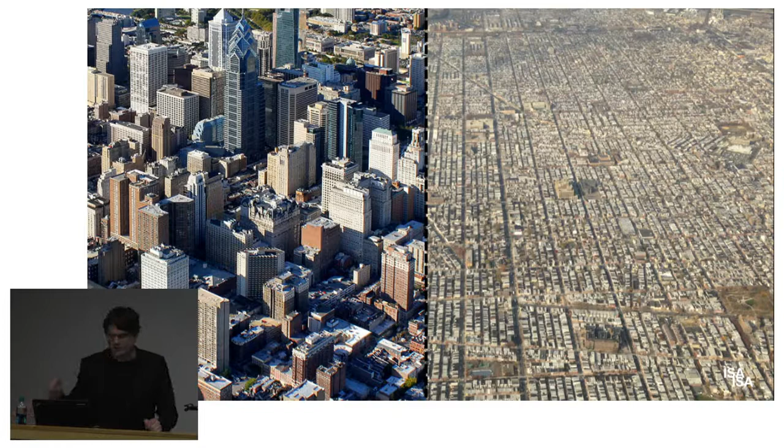But the part of the city that interests us and really got our start is what I like to call the flat, which is this sort of 3-story row house fabric, which you're seeing on the right. Something like 450,000 row homes in Philadelphia. And the density of those blocks is kind of amazing.

There's 100 unit per acre density happening in those neighborhoods where the typical lot is 16 by 50 feet, which might be 4 times the density of the typical. I think someone told me today 30 by 100 is the standard lot, so I think you can fit 4 of those lots in one Detroit lot. So quite a bit of density.

But what we kind of came to, and what still characterizes a large portion of the city, is this sort of fabric where, and as Detroiters you can appreciate this, that's not all a bunch of parks, that's vacant land. So while the fabric still kind of hangs together with the row houses, there's a lot of open territory for redevelopment.

And I think right around the fringe, a lot of our early work, right around the CBD where the 3-story fabric meets the city, which is kind of the leading edge of development, an awful lot of construction has happened there. And that's also where the main industrial ring was as well, so there was a fair amount of vacant land there.

So just a couple of thoughts before I jump into the work. These are just kind of, unlike the words I'm saying which are a little off the cuff, some written, precise words about the way we think.

And I think out of the gate, partly because we opened our office a few years before the housing bubble, which meant that everybody got laid off in 2008 in one afternoon, a lot of firms had to think about how to do things other than buildings. And I think that led us to caring a good deal about buildings, but also caring about teaching and caring about curation and experiments and special initiatives.

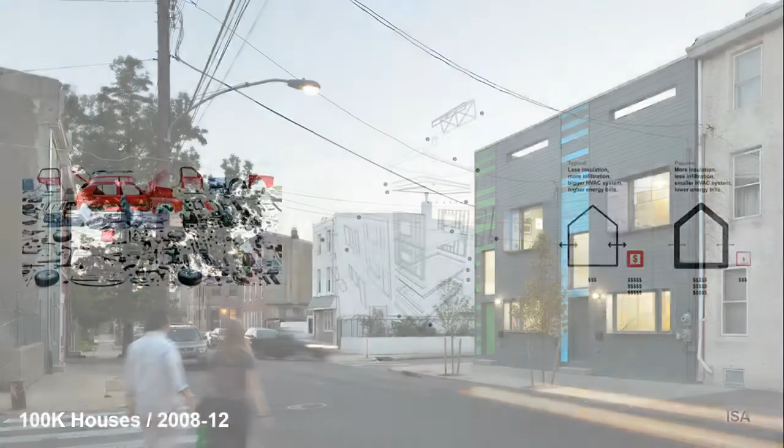It taught us this idea of minimalism and simplicity and a kind of pragmatism about how to make a building. So we found ourselves thinking less about how do we make a cool building that we make cheaper, and more about how do we fundamentally rethink the way we conceive of a project. We really obsessed about every little move.

The initial projects were 4 corners, very flat. That's a picture of the developer with his family in the first house. Extremely Spartan IKEA kitchens, exposed concrete radiant floor, you can see the plywood finishes. I think this house was built for $105,000, which in our terms is very inexpensive.

When I came to Detroit the first time, people were like, that's too expensive to build here. Although we do think there's some version of this that would play very well here. So we called these urban cabins.

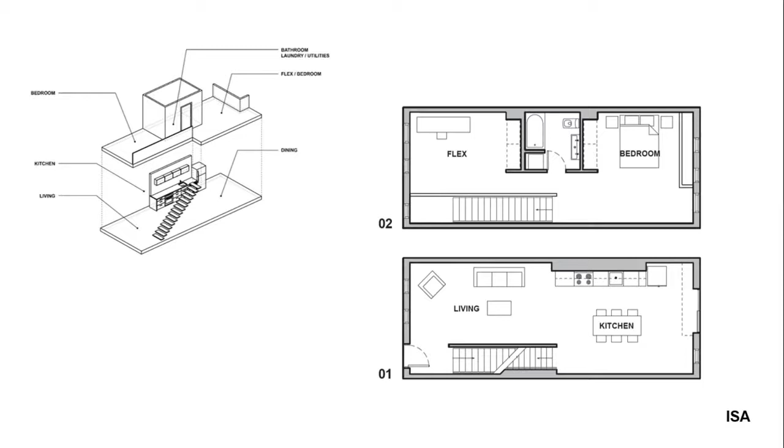This original house had 2 doors, the front door and the bathroom door. We were talking a little bit today about the challenges of mortgages and appraisals, and one of the funny things about these houses is we've done some subsequently where we actually had to put walls in for closing to show closed bedrooms, and then they would get ripped out. It's a whole other conversation, but I think it's an interesting subtext to innovation and the different layers of other things that affect buildings.

Part of our challenge was, what do you do on flat, simple walls? I think all the facades you're seeing here are fiber cement. Here we silk screened on these with sort of t-shirt type silk screen technology.

We love the idea of house tattoos, which we also think would play well in Detroit, just kind of throwing these ideas out. We haven't quite moved on this, this was an experiment that we really want to get back to because we like this idea of housing as consumer products that are fun and are more like shopping for other things than houses, which tend to be a constraining transaction.

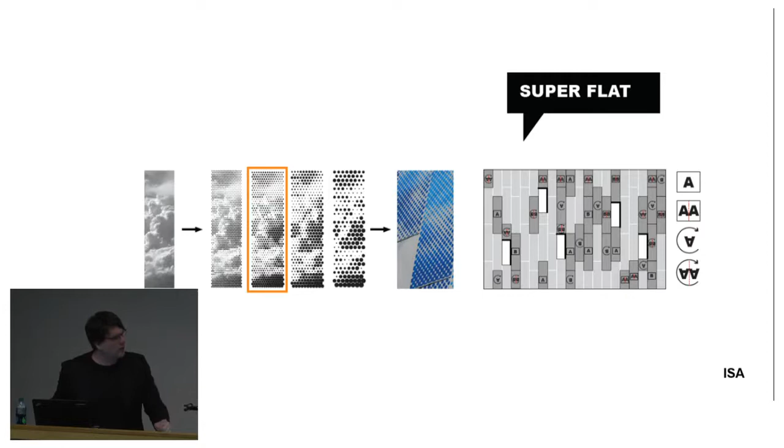I think this was a $5,000 add to the project. We used 1 screen, we flipped them around, extremely simple in deployment. The original houses were built out of SIPS panels, which are highly insulated.

You can see the insulation sandwich there between OSB.

One interesting dynamic worth sharing is that a lot of our work is not built by custom contractors. One of the ways you build a house for $100 a square foot isn't your cleverness, it's the fact that the contractor is willing to entertain the idea that his profit is at a different level. So when these SIPs panels came out, these guys were very confused by what they were doing. That's a real hurdle.

One of the funny things about this project is that these 2-story SIPs rely very heavily on the plumbness of the top of the foundation. If there's a little bit of unevenness, and at this level of contractor there's always a little bit of that, those panels, when stacked, would reveal some 2-inch separations at the top—and these are passive house level insulation. That was an interesting struggle to resolve, which ended up getting resolved in the field. It's just this issue of cost, contractor, and technology aligning that's always a challenge.

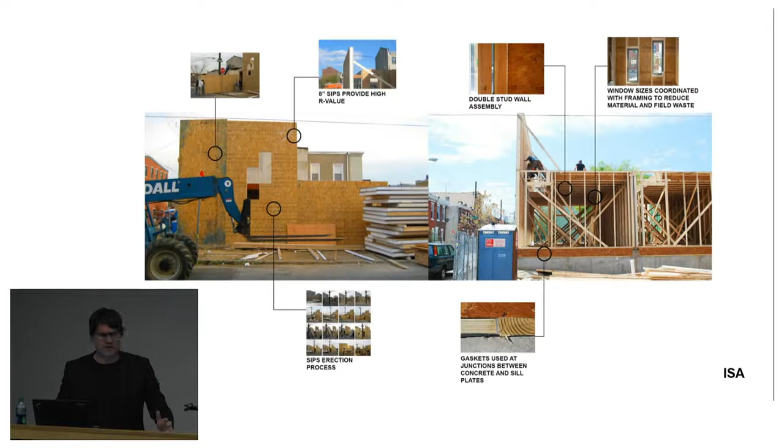We wound up doing, and continue to do, double stud walls because they're really easy to deal with. You can bid them to any contractor in town—everybody knows how to build it. And the pricing has actually been quite good.

There was also a philosophy with this builder. Prefab is a whole other conversation, but this developer was very interested in building local economies and jobs, so he loved the idea of having guys from Philadelphia out here building the houses rather than having them built off-site. This really came together in a nice way.

All of these buyers elected to roll $15,000 into their mortgages to put solar panels on the roof. I think this goes back to the idea of what kinds of houses young people are buying, what their values are, and what they're willing to spend money on that maybe their parents weren't. This was an interesting experiment.

I did mention prefab, and this is another formative project for us—a recession project conceived just on the back end of the bubble, and was a prefab project.

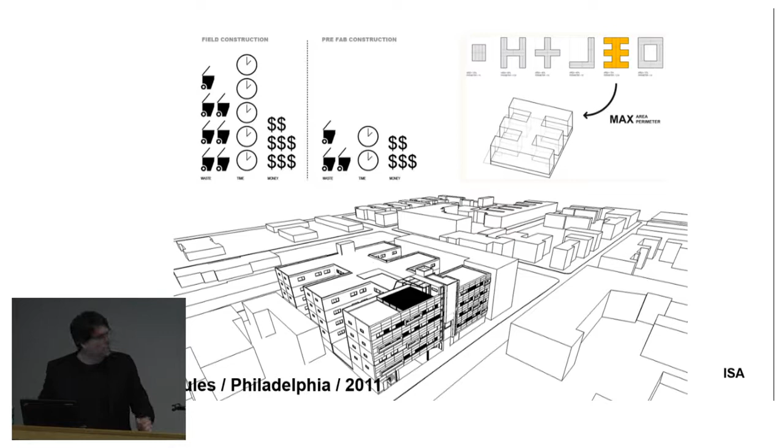This is another infill site, a lot larger—I think this footprint was upwards of 20,000 square feet. This was a 4-story, 72-unit student apartment building near Temple, conceived out of the gate as prefab modular. This developer was really interested in experimenting with that.

You can see the straightforwardness of the plan. Part of our understanding about prefab technology, which we embraced, is that you want to work to their system—as much as they tell you they can do anything—because the moment they start not doing what they're used to doing, it gets expensive. They don't understand fire separations, and a whole series of issues happen. So we really embraced the idea that these boxes would be simple.

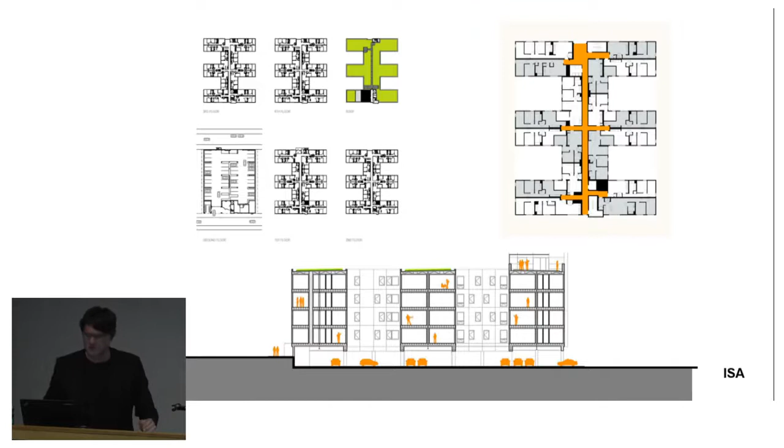There's a shot of the alley side of the building. The building was clad in the field. I have some images here of the construction.

This is a little random, but I want to say something about Philadelphia green roofs. Philadelphia has a really aggressive stormwater law that requires the first inch of rain to be managed on site. So what's happened is we get what we like to call ugly green roofs, which we kind of love—they're not there to be an amenity as much as to be a sponge. This was actually the largest sedum green roof in Philly when the project was finished.

Here's how the building was built. If you go to our website, there's a video where you can see this being recorded—you can see the OSHA laws being violated by the guys under these boxes hanging up there. This technology at this scale, at this time in Philly, was a brand new idea. One of the interesting things was it happened very, very fast—the whole building was built in 9 months.

And what was really interesting, you'll kind of see that here.

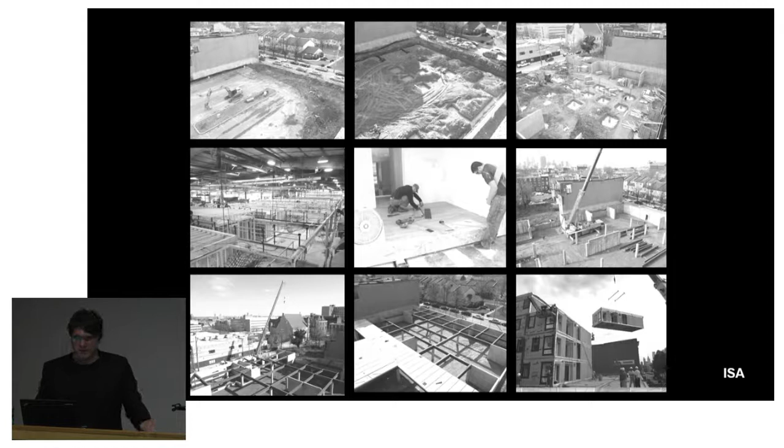The site work was being done on top while the boxes were being built in a factory in the middle row, and then they all came together on the bottom there. And those 72 units, I think, everything was a modular box. The stairs, the lounges, I think it was 90 boxes, and they would set about 8 or 10 a day. So if you do the math, the building appeared out of nothing in about 2 weeks, which is kind of an extraordinary thing.

But then what's interesting is all the seams, so the boxes come out with finishes, kitchens and bathrooms in them, and then everywhere the boxes come together, you have to go in and finish. So it's a very different idea about building. There's a lot of room for innovation there, because we're used to building buildings in layers where all the plumbing, all the drywall, all the tile goes in. This was more these sort of chunks that are complete with these seams that kind of need to be infilled.

So this is a more recent project, which I thought would be kind of fun to share. This is a very quirky, weird site. It's 15 feet wide and 100 feet long, and that's an elevated train line.

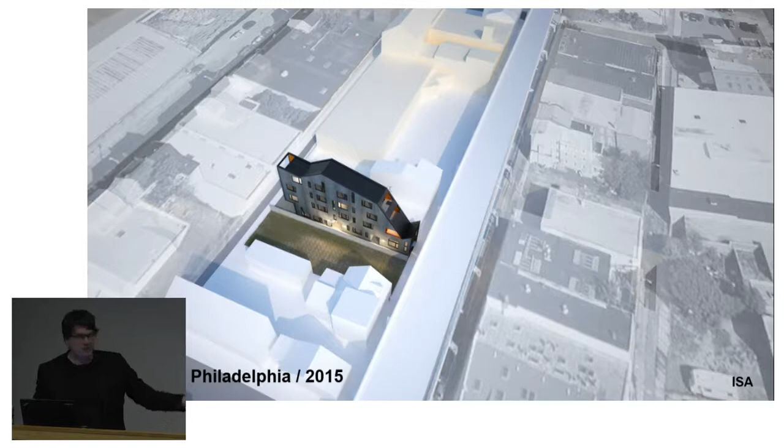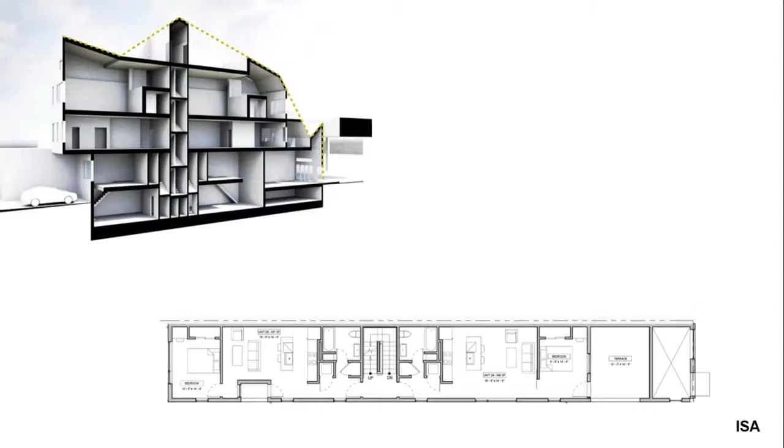And so we kind of used that line to sort of develop the membrane. And what was interesting is those sloped pieces were able to create some terraces. One of the things we had to convince our client of, who bought a cheap piece of land next to a train line, and his whole thing was like, how do we make it feel like you're not living next to a train? And we were like, well, we're kind of thinking maybe you should just go with it. So we have these terraces that are actually right on the train. And while you hear the train go by, it's kind of an exhilarating experience.

And I think we take great pride in turning — it goes back to this idea of getting developers to collaborate on building the city well, and I think it's a very exciting pursuit for us. So I think this project kind of comes out of the 100K house DNA. We're starting to look at whole blocks now.

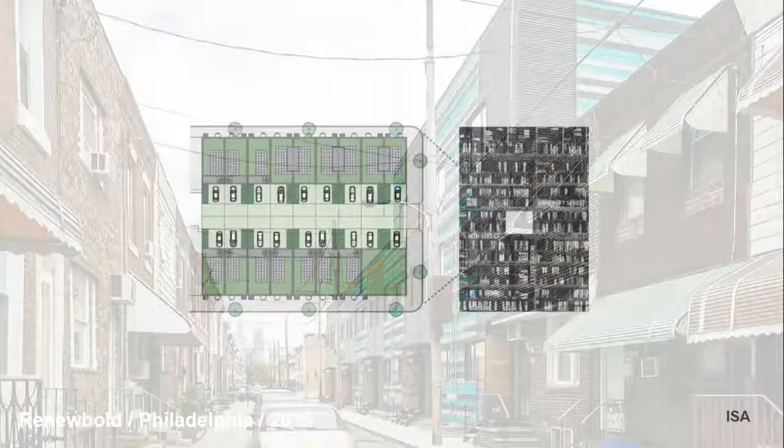This is a collection of buildings that are 2-story row houses, 3-story row houses. The bottom right corner there is a commercial first floor with 2 flats above.

You know, we're actually using drivable grass in the middle where cars can park, but if everybody decides not to park there, they can have a party, kids can go out and play. So there's some flexibility in how that space gets used.

Kind of get a sense there of the massing and scale, and there you can see the different building types happening: the row house models on the top and bottom of those plans, and the condo flats in the middle.

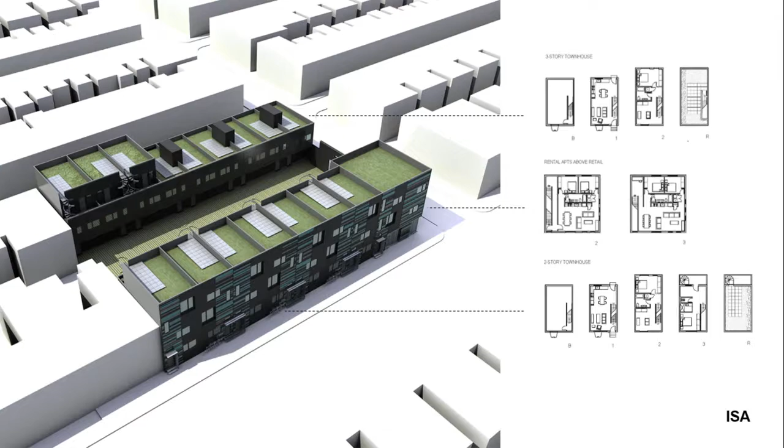And so roof access is a big deal in Philly, particularly if you're providing off-street parking and the sites are small. So these roof experiences become significant.

And what's interesting is, this was a project subject to the stormwater law, and so green roofs become a way to meet it.

So these are just some of the things that we play with to achieve some of these goals.

So I'm kind of working up in scale. This is currently going through approvals and is a much bigger project, pretty close to the center. It's one of the bigger pieces of ground left this close to the city. Large-scale developer.

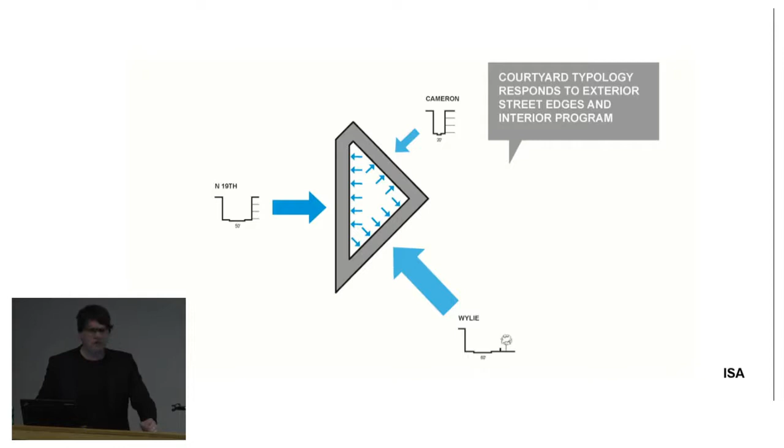And so we had this idea that the courtyard was kind of responsive, and even though it's sort of large—I think this is 70 units where it sort of stands now—we kind of like the idea of the courtyard presenting a different personality to these different frontages.

So we were able to convince them that not only should this become 3 different buildings with gaps, but we should actually start to perforate the first floor so that people can use this as a sort of cut through.

And so what we began to think about was the idea that we would arrange these boxes as sort of a modular system, and all the buildings obey the 16-foot wide grid, so we can kind of push and pull pieces and go from single family to multifamily pretty easily.

But the idea would be that you can get some higher pieces on, so we're gonna omit some boxes, but ultimately we're gonna get the same number of total boxes because we're gonna put them on top. We didn't quite do that, but we're somewhere in between.

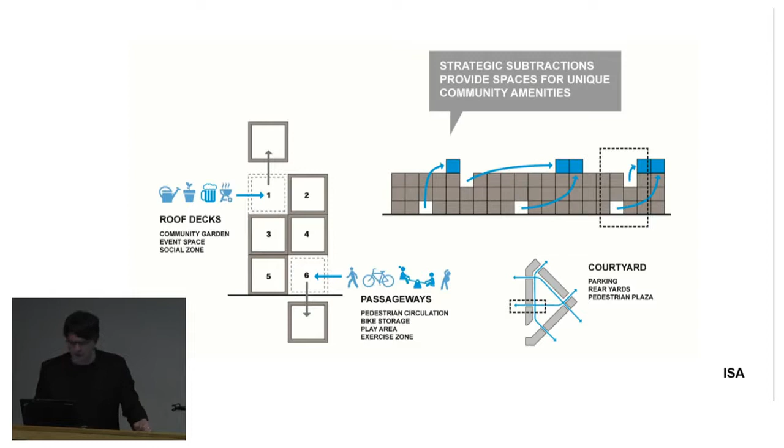But they really embraced this idea of the pass-through, and so the social life of the project—on the left you're seeing a way through from the street, on the right you're seeing one of these corridors created within the courtyard that leads you out, and then this idea of the roof deck, created when we put boxes on top and create these gaps. So there's a lot of private space in the project, but also a lot of shared space, and this idea of block making.

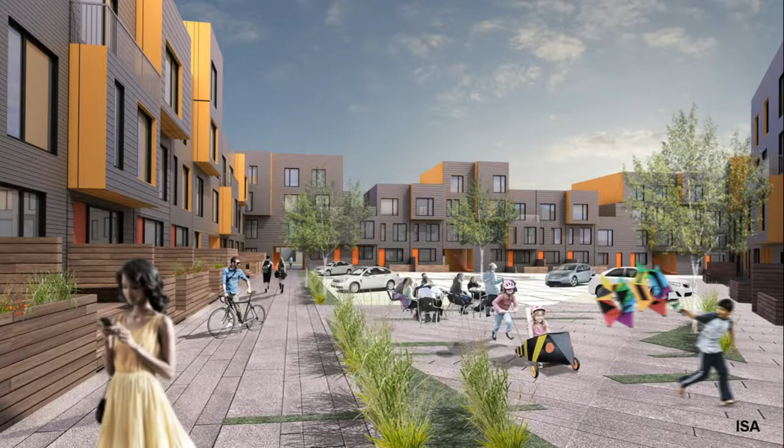So this is the sort of courtyard that we're conceiving of. One interesting thing is that small yards are an amenity people in Philadelphia hold dear, but we had a conversation with our client about the fact that this site won't support yards the way some sites will. So rather than forcing that on a site that doesn't need it, we conceived of a more social backyard space, more of a terrace, where people barbecuing can decide to eat together, see their kids, almost like a promenade where you see your neighbors in a classic way. The client really embraced this idea of making the most of the site presented, and we're excited about that potential.

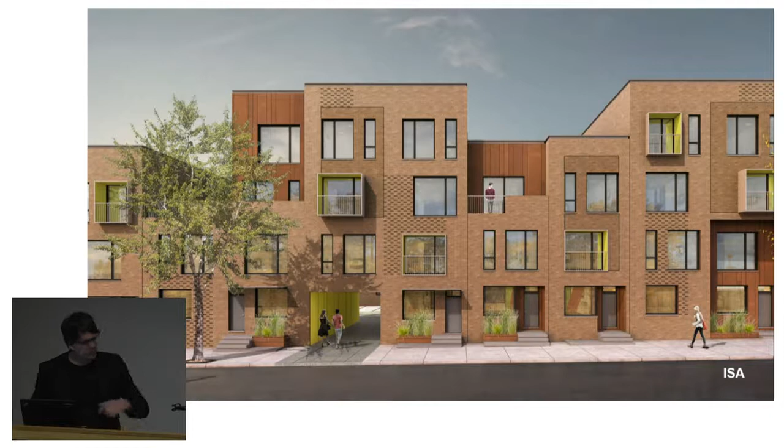This is a corner, so the park is across the street - I don't know if you can quite appreciate the narrowness of the street to the right, but that cartway might be 9 feet wide. You can see how that frontage doesn't have as many projections, and the first floor is set back. We had a lot of debate about how continuous the courtyard should be and how much diversity there should be, and this is where we've landed with this wall building that wraps the whole block.

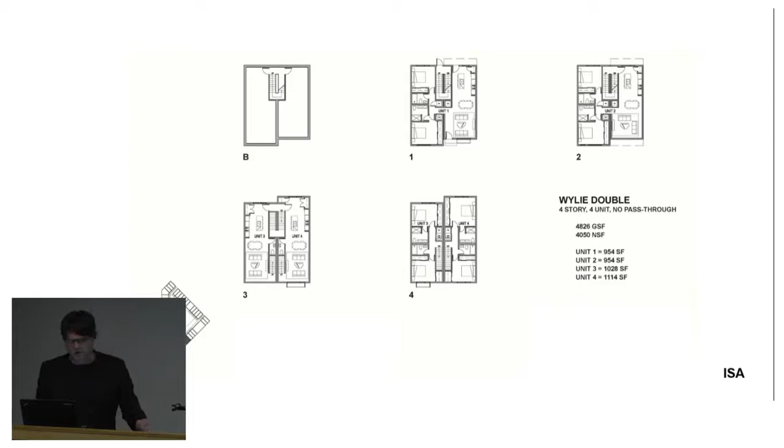The multifamily buildings use the same 16-foot dimensional component, so we fit these buildings into apartment flats that fit into the space of those single family homes. What's interesting is the client, as they refine their pro forma, can mix and match the number of apartments versus the number of single families.

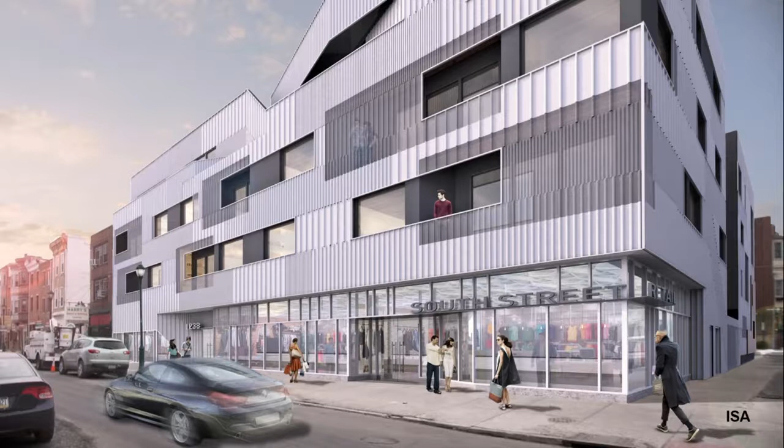This is the building as conceived. I'm hoping the proportion of that is right—just realizing it might not be, looks a little compressed from here. But this language of metal cladding and the transparency of the balconies is interesting. It's got a bit of a Bourbon Street feel, where it's cool to come out, but you want to be a little protected because you're not quite sure what might be going on there.

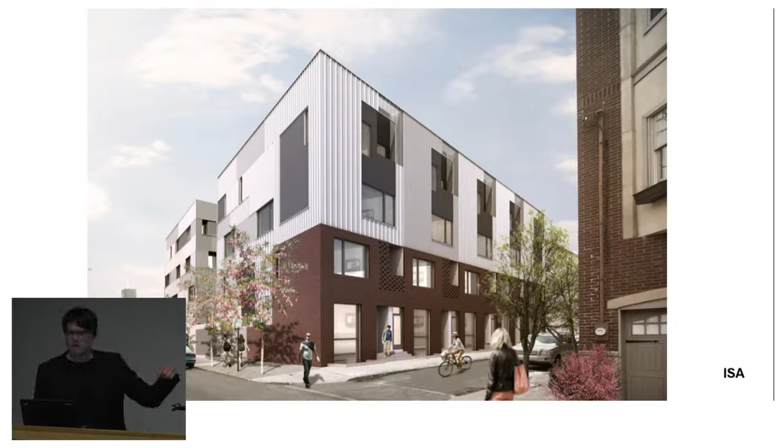This is a little like the last project I showed—we've been intrigued by projects big enough that you're addressing different neighborhoods on different sides of a block. In Philadelphia, on South Street you've got the terraces and the nightlife promenade, and literally on the backside of the block you have a 15-foot wide neighborhood street. So we're thinking about how blocks can get completed in that way.

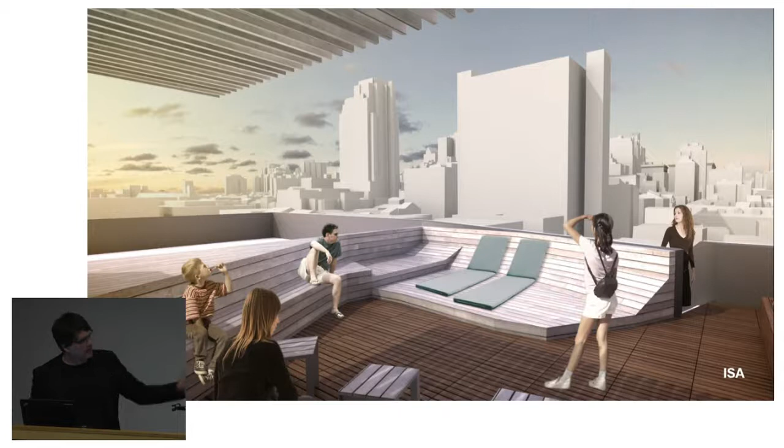There are some particularly nice units on top that have access ways to the roof where you're actually outside. This is the ground level experience at retail—this is a retail corridor. The roof experience is up that exterior stair, and it's interesting that in this building the top two units are quite expensive and maybe have people living in them you wouldn't expect, while there are other kinds of people living in the building too. I think that's related to that last project—these projects that seem to have some diversity in them.

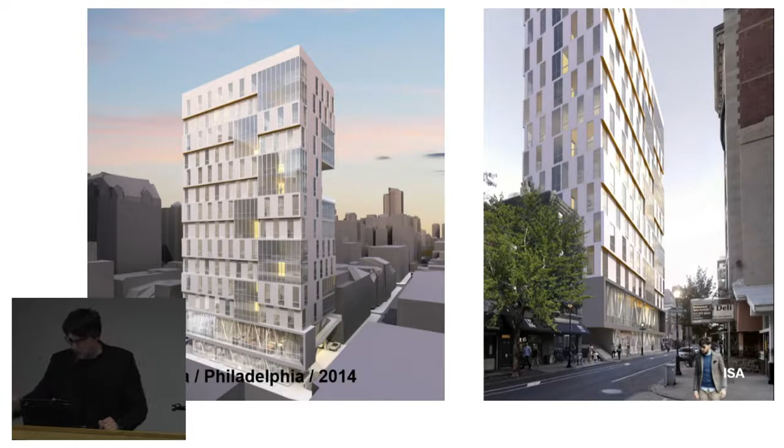The thing I want to talk about here, which is very programmatic, is this idea that we looked at this project from the micro-housing standpoint—a term I'm sure you've heard, coming out of markets like New York, Boston, and San Francisco, where things are so expensive that scale becomes a way to get access to certain areas of the city. Philadelphia is not that town—you can generally go around the corner and find something affordable. So what was interesting for us was thinking about micro-housing as a Philadelphia-specific idea.

For us it became much more about a lifestyle, this idea of shared and flexible living. We were very interested in this post-college, pre-family period of life, which I'd characterize in places like Philadelphia as this incredible number of people between 25 and 35 who are working, being entrepreneurial, opening companies, and looking for a different kind of housing situation. We think that's quite an interesting possibility for buildings like this.

Just a couple things to point out as I talk—we love these kinds of catalogs, and we call this the periodic table of micro units. The x-axis is width and the y-axis is length. This goes back to client transparency: in a meeting with our client, we basically say, as you begin to enlarge and tweak the scale of these units, these are the different things that happen, to talk through what's possible. That dotted line area is the sweet spot of the size of unit they thought they wanted.

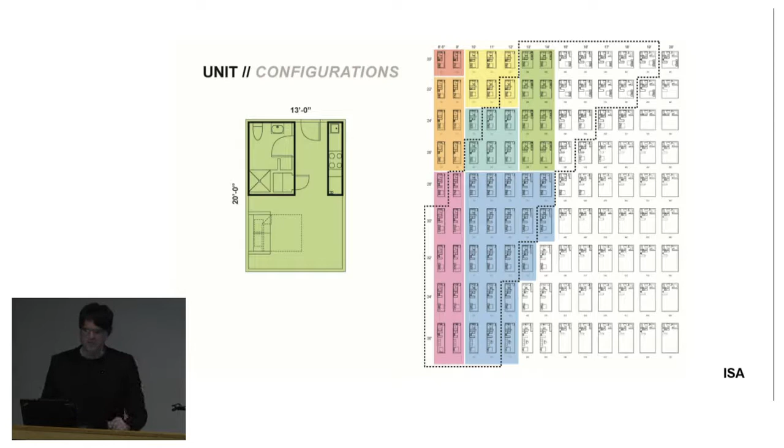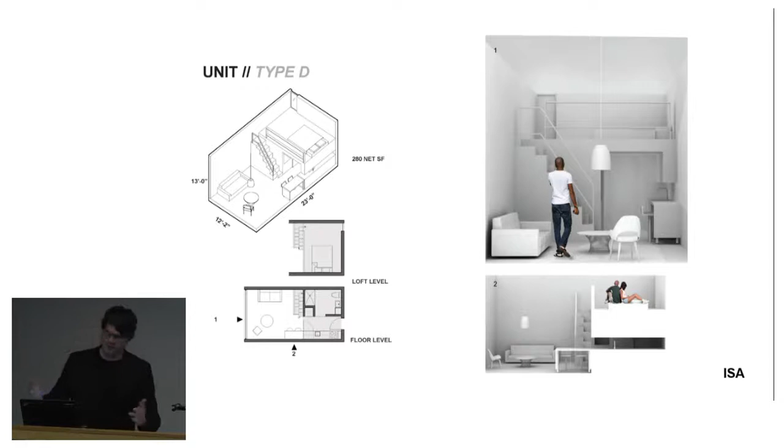So then we go from that to looking at how that works. What's interesting about this site is we had far more allowable height than FAR, meaning we had additional vertical possibility, which led to this idea of the mezzanine—less than a third of the total area of the unit isn't a floor. That led to this verticality in the units, and we experimented a bit with how those might work.

We were really interested in the defining characteristic of this building being the idea of shared spaces—the laundry bar, the co-working space, the commercial kitchen, which is where you'd host your dinner party instead of in your unit. The lifestyle of the building is that you're paying for a bed and a small private space, but there are all these shared components that allow people to achieve the kind of lifestyle you see playing out in the urban fabric of a lot of big cities at the moment.

And a little nod to the Philadelphia neighborhood fabric: this idea of the hallway stoop, where you get a little hallway-side niche to hang out, and these hallways become a little bit more like streets.

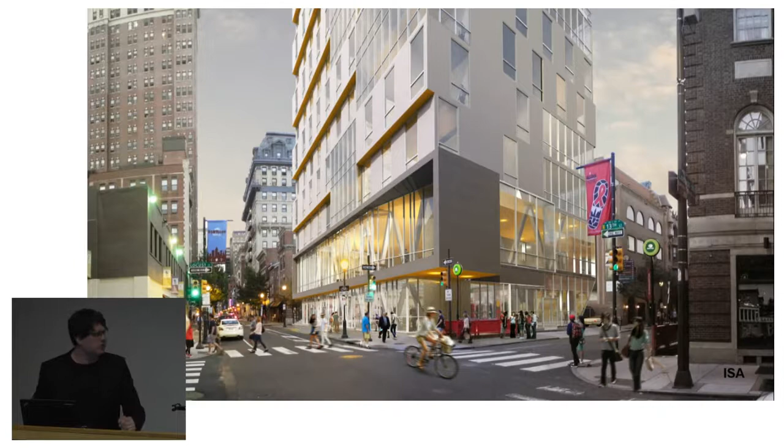And that's the context of that project. One of the thoughts too is retail on the first floor, and then the second floor is this kind of makerspace, co-working space that really is also a condenser for both the neighborhood and the city, but also the people living there.

It's 12 feet wide, and it's literally right on the edge of Chinatown. What was amazing is we got a by-right zoning permit for this. We were all laughing that this could possibly happen, that we could meet the zoning code explicitly, but we did. So we're super excited about it.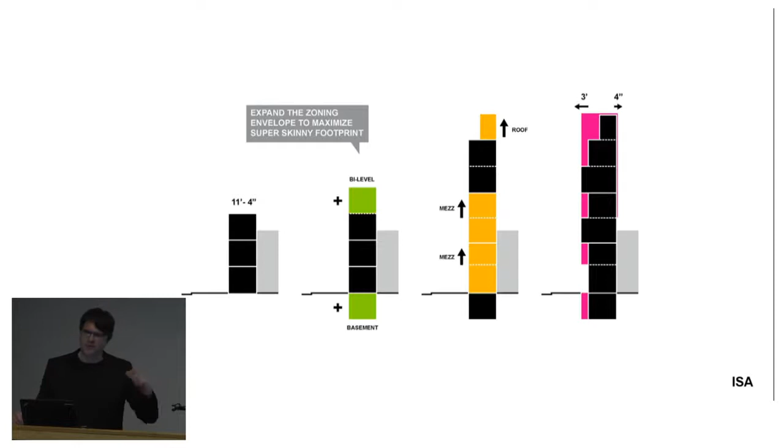Really the thought here was, how do you maximize the scale of a 12-foot wide site? This is a section investigation, and the idea was we should use the basement, create bi-levels, do the mezzanine trick we were talking about before to get more verticality without adding a floor. Then there was this idea that in Philadelphia, you're able to project off a facade 3 feet. So we're putting all these things together to develop this little wafer building.

Units actually aren't that crazy. We'll look at them. This gives you a sense of the scale. It's actually like a skyscraper, it has the proportion of a very tall building, even though it's not that tall. We don't think this will all be wood frame, sadly.

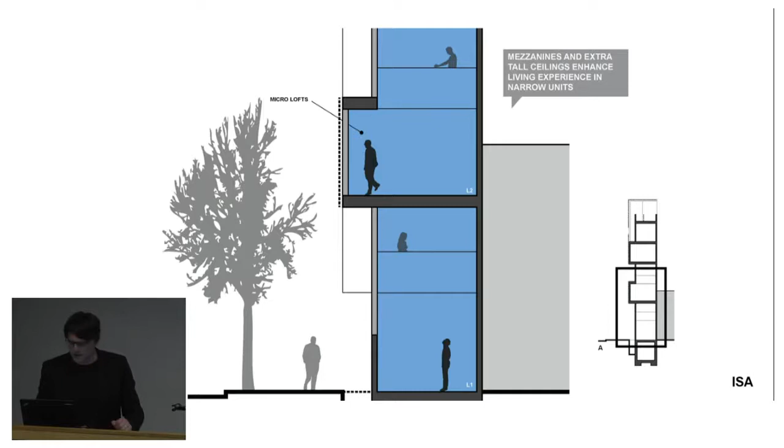Here you get a sense of what this is as it goes through the section of the building, and you can see ways we're looking to grab extra space and occupy the site in some unexpected ways, one of which is to make the basement feel like a reasonable place to live, and I think we're getting there.

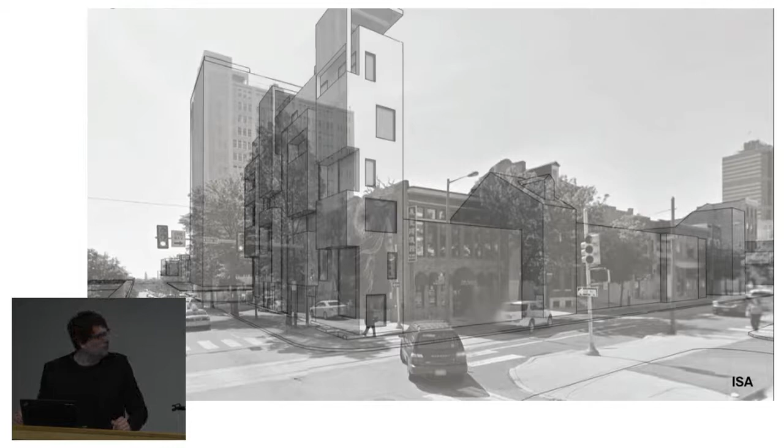And it's a fun site. We haven't really designed it, but this is the proportion of the building. We're also pretty excited about the fact that from the sunken highway, it's going to be quite a prominent experience. So this falls into the category of kind of weird leftover sites that we really enjoy working on.

And I think our move about this, going back to that other project, is if you're able to prove maximum value, you can generally get this conversation to go forward and get good real estate developers to embrace the idea.

That was the longest category, by the way. So that was, you guys are like, oh my God, I remember that was by far the longest category. What's my cut time? I have my clock and I can do whatever time.

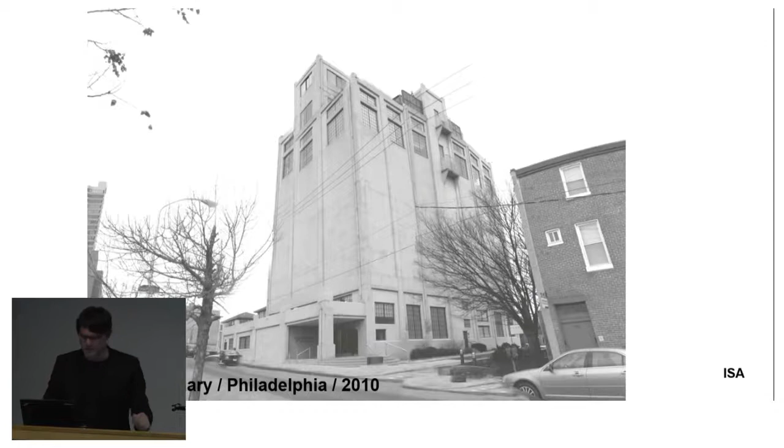What's that? All right, so again, I just want to start with a sort of formative project, and then we'll look at some more recent stuff. So the granary, which was a firestorm for us for a number of reasons, but we also learned so much from this project, and this is very interesting. It was actually the first example of slip-form concrete in the US, which is why it's on the historic register, and was really smack dab in the middle of Philadelphia industry.

Actually, the site where it says Industrial Works, there on the left, is where the Barnes Foundation is, that was recently built for that collection. So now this area of the city is completely transformed, but this building remains. And it was built in the 1860s out of wood.

If you didn't know, grain is highly explosive. It blew up. It was rebuilt in the 1920s as this concrete building.

And then when the grain transfer point and infrastructure changed, the building went basically into disuse. And in the 80s, there was a kind of eccentric designer who had his office on the bottom and a legendary party penthouse on top, which is often the kind of use these buildings fall victim to.

So we were very interested in how you put this building back to work, and the idea was to build housing on top, as you see on the future side. And we measured the amount of housing we could put on top by thinking about what the grain probably weighed, and said okay, that's the foundation for the building.

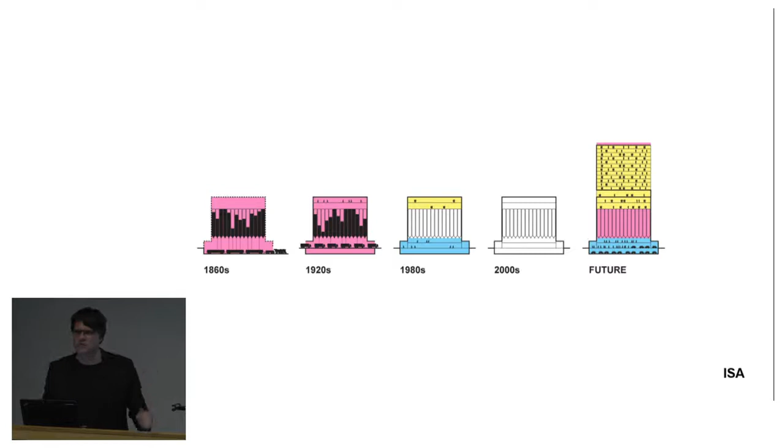And the cool thing is that in urban areas, sometimes people like to get up high and have views. So our foundation was starting at floor 9. So the first floor of construction had great views.

And then what was interesting is these grain silos - there were 72 of these crazy vertical storage compartments. The idea really was to reuse those as galleries and for environmental purposes. We figured we could store stormwater coming off that building in one of those for like the entire year. They were so vast.

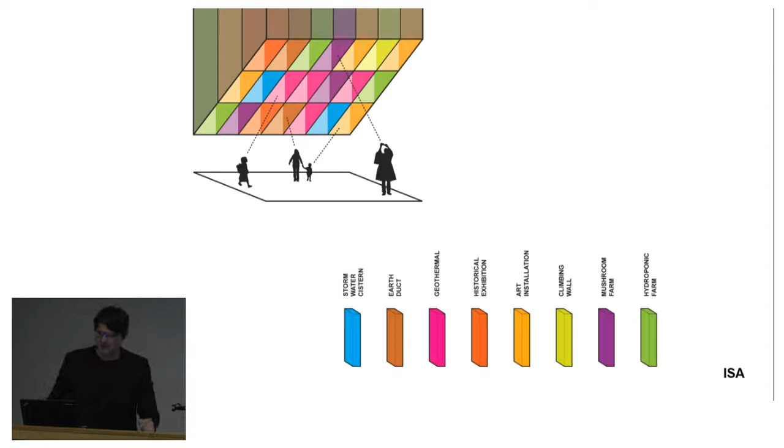We talked to our MEP engineer about how the middle cells could almost be like earth ducts, because the temperature was so insulated from the outside, and there'd be some great thermal transfer. And then the idea of galleries and other things, and the climbing wall there for the residents.

But this really for us was a really important project in thinking about history and understanding. And I think this is very relevant to Detroit in the sense that Philadelphia is a city with an embarrassment of old buildings that just don't have a life. There's no market to regenerate them. And I think this idea of taking more aggressive, clever approaches to them is important.

So when this project ultimately died on the back of, quote, 'this building is as important as City Hall,' which we were baffled by from a historic perspective, but our whole position was the building was built to do work and it should continue to do work.

But I think what really set them off was this idea that the penthouses in that glass box were kind of living among the ornamental detail on the top of the building, which you could no longer see from the outside. But I think, again, for us, the thinking was how do you really - not in a sort of boutique way, or relying on some museum to move in and take care of the building in a non-economic way - make this work.

So climbing wall and mushroom farming was really the final proposal. Didn't go forward, but...

I'll say, later in the reflect section, which isn't as far away as you think, I'll talk about how that spun off a research project, seeing that relationship between speculation and architecture.

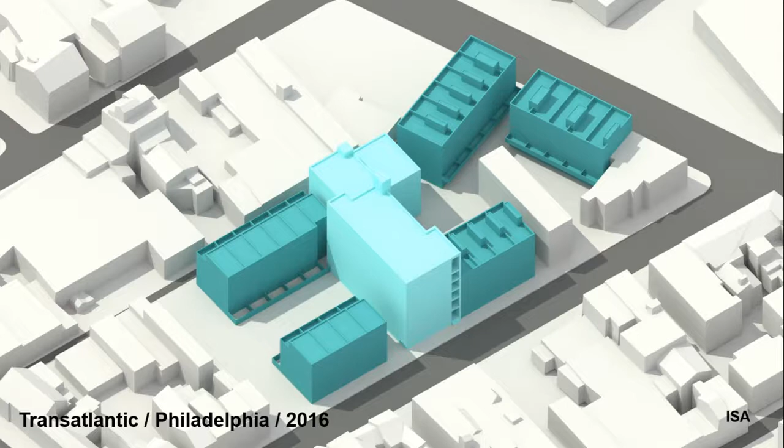So this is a reuse we're doing right now, and it's kind of interesting. There's a 6-story existing warehouse in the middle, and then we're building houses around it. I think this falls into the category of a whole block that transforms itself as it hits different frontages.

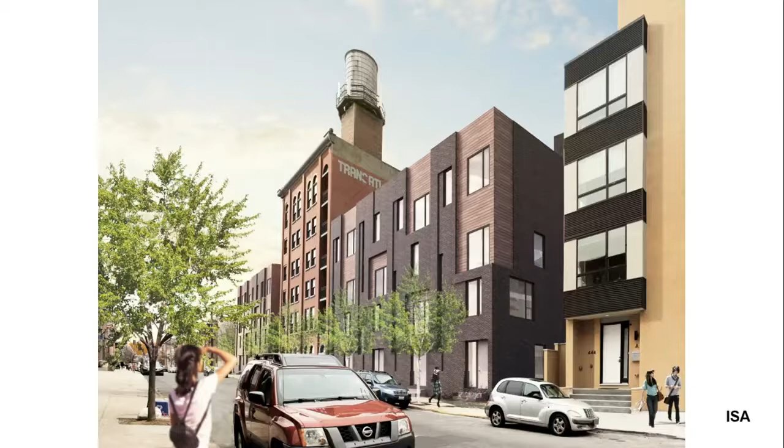So that's the building with the water tower - that's the one we're renovating, and the houses flanking it are the ones we're proposing. And one of the things we did was we really enjoyed this idea of the warehouse street wall, and so that's actually 25 townhouses.

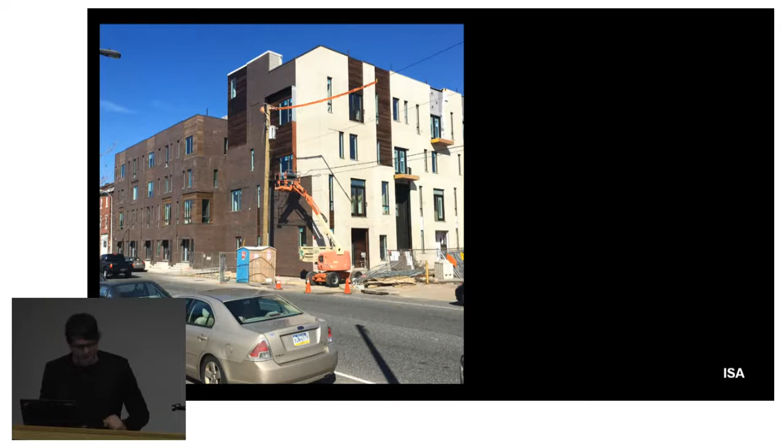This is kind of the narrow street that has a certain typology, and the wider street has a bigger one. Tons of under-construction photos just because I wanted to share that with you, but this is about where it is - it's a little further along than this.

But that's the narrower street that has these terraces that come out, and you can kind of see that the front doors are pushed back. This is the busiest street - the facade flattens out, and the first floor is buffered from the street with some program.

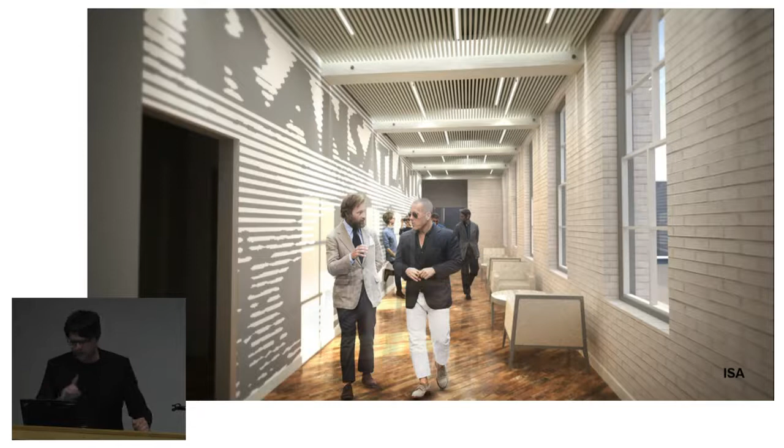So this idea of the block transforming - this is the existing building we're working on. And really that existing building has really awesome bones, and we're just whitewashing the interior and putting some kitchens and bathrooms in. So that combination of existing building and new construction completing the block, I think, is the story here.

We were having this conversation about whether you return Detroit to its existing fabric. At some level it's like, hell no, it's going to require a lot of people. But in this particular situation, which is a highly gentrifying part of the city, returning the fabric—that back alley is a horror show right now. Our argument to the neighborhood was that we want to front houses on that alley. It was obvious people wanted to put parking back there, but we stood by the idea that we should complete that alley, because that's part of what makes the neighborhood awesome. So it's an exciting project for us as far as urban fabric.

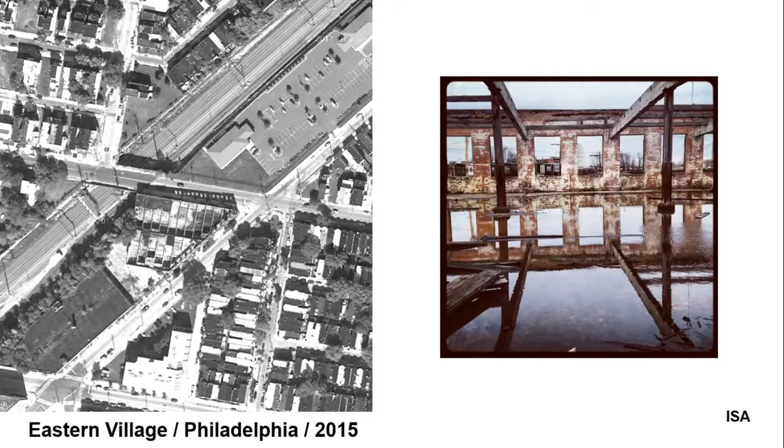This may be my most relevant Detroit project. This is a historically registered building in Philadelphia. This was like the first parking—in Philadelphia, every building is the first something, which is a bit frustrating sometimes. This was the first parking garage associated with a railroad company, and there's the railroad company. But literally, we found this building without a roof. That Instagram photo is our first site visit.

So the proposal is just to build a neighborhood inside this building and leave the roof off. The National Park Service battle on this was intense, because they're trying to get tax credits, and the idea was we had to retain the roof line and all kinds of things. So the building doesn't come above the outer wall, but this is getting built in a related form. The idea is you're basically taking that shell of a building and using it as a platform for something new.

I think this is very much like the Granary project, where here's a bit of history, and our solution to it is based on current economics, not aspirations to return to something that doesn't exist anymore. On that basis, we're extremely excited about this model, or this system or prototype.

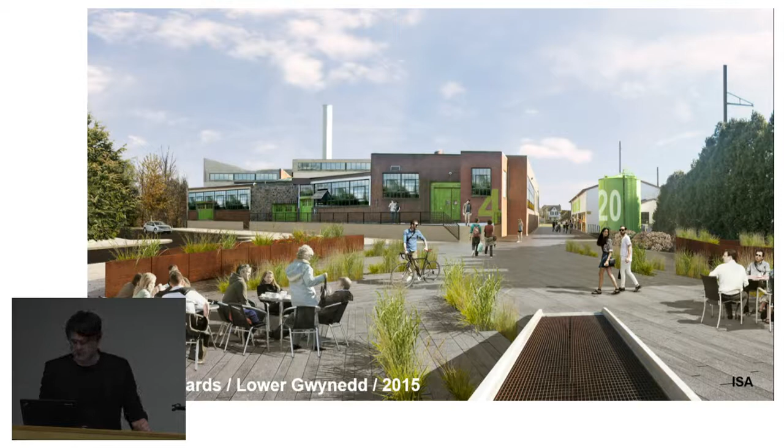This is more of a campus kind of thing we're working on, an old chemical campus—an old BASF research campus outside of Philadelphia. The idea here is simply to return—this is an incremental project where it's not about restoring every building to its former glory, but lightly enhancing some components of it. You can see with color, annotation, and landscape in a very subtle way, this creating of an urban space where there might not be one.

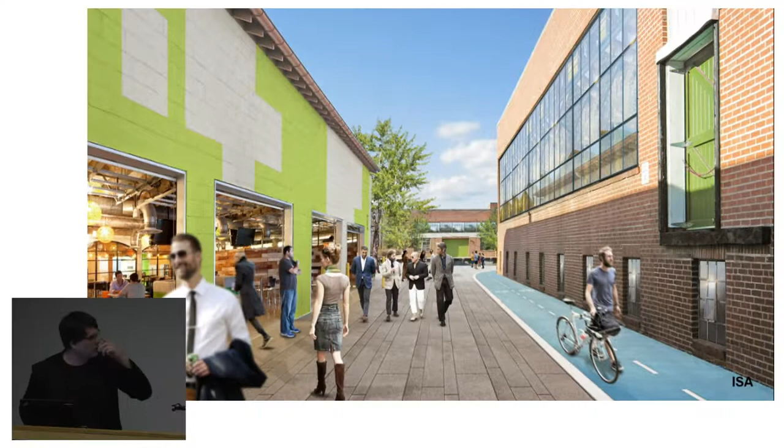On this kind of building, which doesn't need a whole lot of work, the idea is not to spend tons of money renovating the whole building, but to let the existing building sit and begin to modify some of the components to develop a kind of language around all these buildings. So the lobby gets impacted, but the back office of these buildings kind of remains.

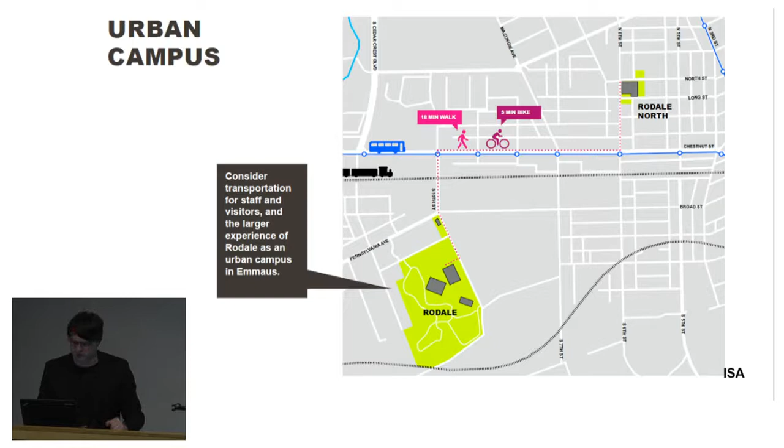This is a related project for Rodale Press, the largest woman-owned publishing company in the United States, I think, a little bit north of where we are. It's interesting—they're based in New York and here, and it's very expensive to do photo shoots and some of the work they do in New York City, so they wanted to create a creative hub in this existing warehouse, which is pretty unremarkable at the moment.

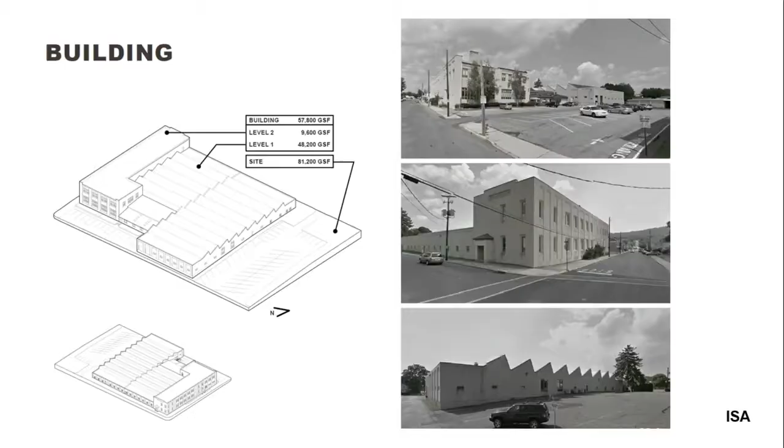They're very interested in food and test kitchen stuff. The proposal is to remove—there's a funny entry chunk we're removing to create a courtyard, which opens up a new social space. There's photography, a little overnight accommodation, and a test kitchen that will create this incubator. Maria Rodale talks about Emmaus becoming Portland—we're not holding our breath on that, but the idea that they see this relatively modest renovation project as a seed for the transformation of a neighborhood, we find really interesting. And that's looking back out from the test kitchen to the plaza.

See, that was pretty quick, right?

I think now the deployable work is this lighter layer we've become interested in. This is a public seating project we did - just goes to show, the budget for this was $20,000, done. We had to bring the benches out; they were expecting to get one, we gave them 3, and they were really happy about that.

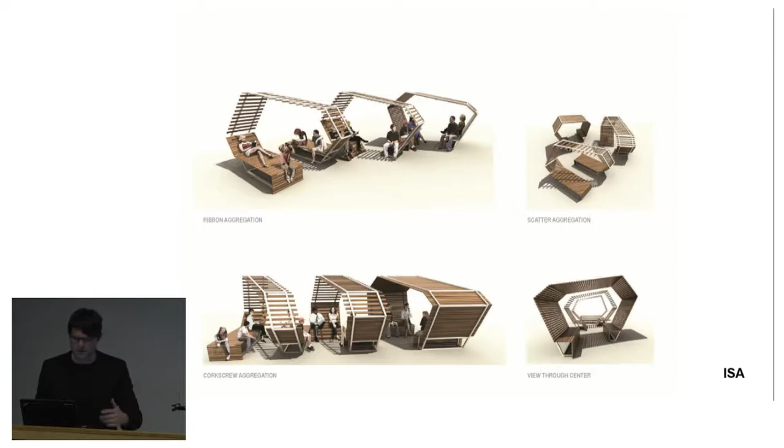The idea here was that if you develop a new kind of public seating, you want it to look like a seat - it can't be so different that people won't sit on it. The idea was to create a kind of social comfort among people, a delicate balance between feeling like you have your own space but also being proximate enough to others in a comfortable way to want to engage.

It was built with local craftsmen and fabricators, and devised so it can come apart easily and get moved. It fits together in 3 pieces, geared toward the maximum weight a union guy can carry with a friend - all these rules, but we managed to solve that. Here it is going together.

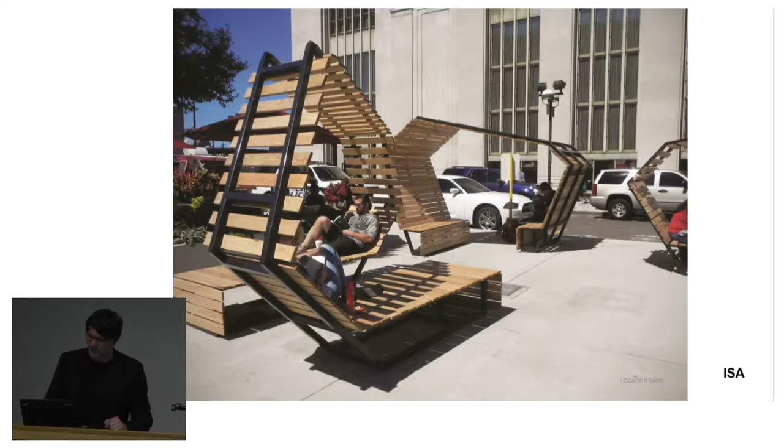This is the main train station in Philadelphia, and it was used in a certain way there. Then this was it in a neighborhood park out in Philly, and this was not staged - this was just us showing up and people wondering why we were taking their picture.

It was really heavily used, and I don't really capture all the crazy things that happened, but we had an Instagram feed, and we saw things on these benches that were unspeakable.

It was really interesting as a kind of social infrastructure for the city. I think it may have worn out by now - I think it was in year 3, when large dogs were running over top of it, and Tai Chi was happening in strange places on it. But we really got excited about the kinds of impacts you can have in small ways.

This is maybe a more formalized version of a similar idea, and we love these assignments where someone has a crazy notion and we test it.

Philadelphia is full of tactical urbanism and beer gardens - it seems like when the weather is good, you can sell beer anywhere. So this guy wanted to take existing surface parking lots and build a platform to put beer gardens on them, because a lot of these surface lots in town are in amazing canyons with buildings around them, and his idea was we can really monetize this space.

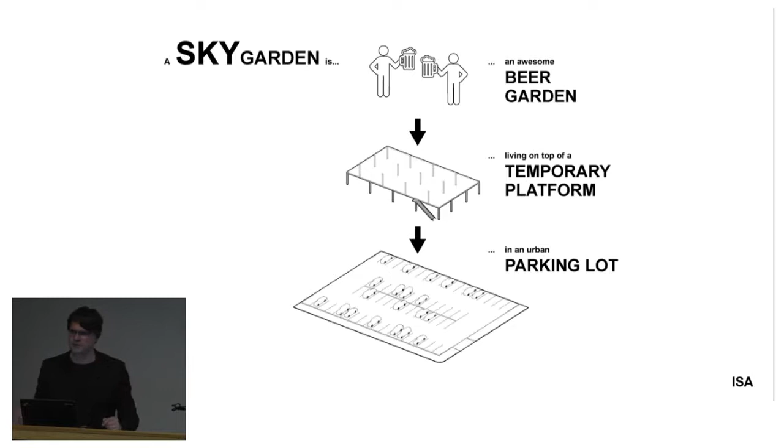The proposal was this kind of system where the platform is actually off-the-shelf technology from a company in Cleveland. The bar and restrooms are in containers, as a strategy for deploying this on a seasonal basis. Really, this again gets at the idea of prototypes and thinking about systems of occupation.

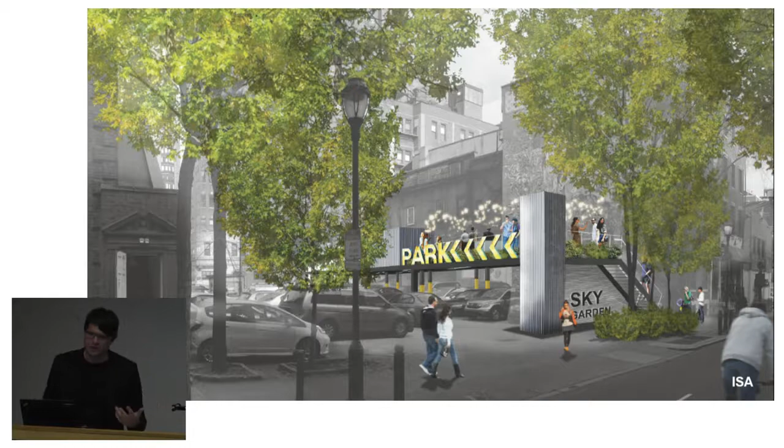What was fun was speculating about this added value idea - there's a beer garden on top of parking, is there a benefit both ways? During the summer you get shaded parking, so you can charge a bit more for parking - though there might be a risk you get some beer spilled on your car, we'll see how that might go. This was our exploration of the beer drinking experience on top and the car parking experience on the bottom. But we have a number of really interesting assignments coming up.

There's a renovation of an existing pier on the river being conceived as this kind of crazy maker space, market, and beer garden. Another project we're looking at is a large-scale tactical installation that precedes a large private development - a $1 billion, 10-year build - where they want to get people on the site in the first season and make a public space for the community, which may live on as the project gets built around it.

One of the things we're thinking about there is actually playing around with the ongoing construction as a kind of visual for the community space. We talk a lot about this sort of permanent temporary work, which I think has a lot of application here as well. Some of this work, and I am going to show a Detroit idea here.

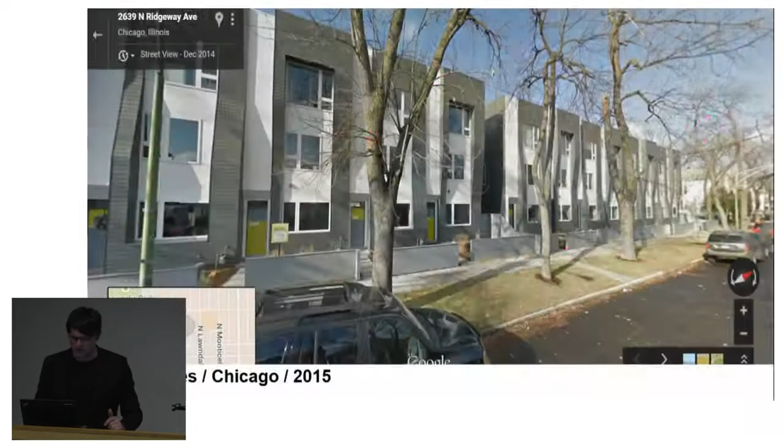We're going to get to that. Some other cities we're working in. My new partner's in Boston, we have some projects going on up there. A client from Chicago flew to Philly and said, I like these 100K houses, let's do some houses in Chicago. So we've been doing some work out there.

This is a 31-unit project, based on the fact that there aren't that many attached houses in Chicago, actually. This was like a half a block project, a little bit like some version of what we did in Philly. Beyond it having a lot of 100K characteristics and being energy efficient, even though that didn't seem to be a priority for him, we said, Bob, just do a blower door test. Let's just pay the $100 for the blower door test, and the infiltration rate on these houses is lower than some of our LEED Gold houses in Philly.

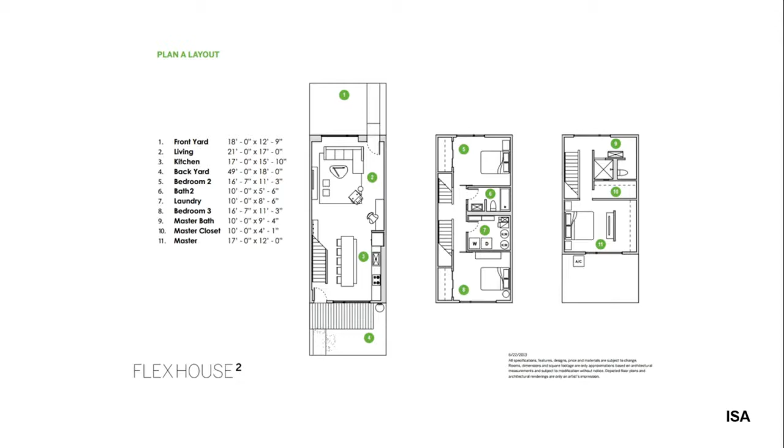Stairs are often places in these buildings where we're able to add a little bit of value. This is our riff on the Chicago 3-flat, and I think what was interesting about this is...

This kind of goes back to the Chinatown thing a little bit, with finding the basement level. I thought I had a diagram there somewhere, but basically the courtyard is excavated, so there's windows in the basement level where you walk out from the basement.

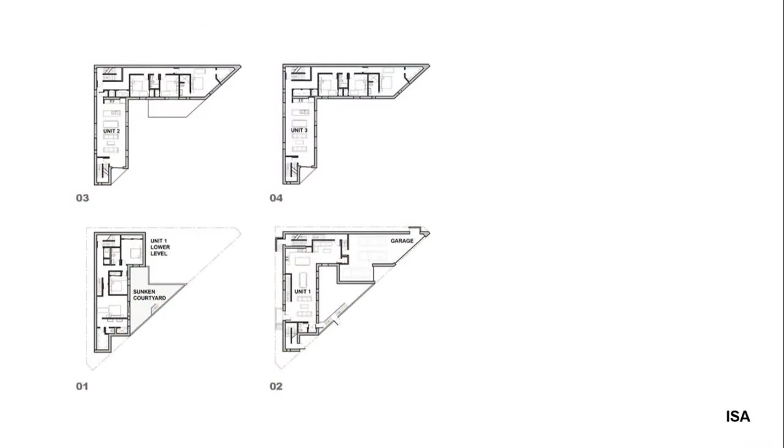You can kind of see the units are designed with a living side and a bedroom side. There you go—so there's a roof deck, there's terraces, and there's this sort of sunken courtyard, and you can kind of see the missing triangle site there.

And there you can get a sense of what that experience is like down in that courtyard, which actually makes that basement unit really, really terrific.

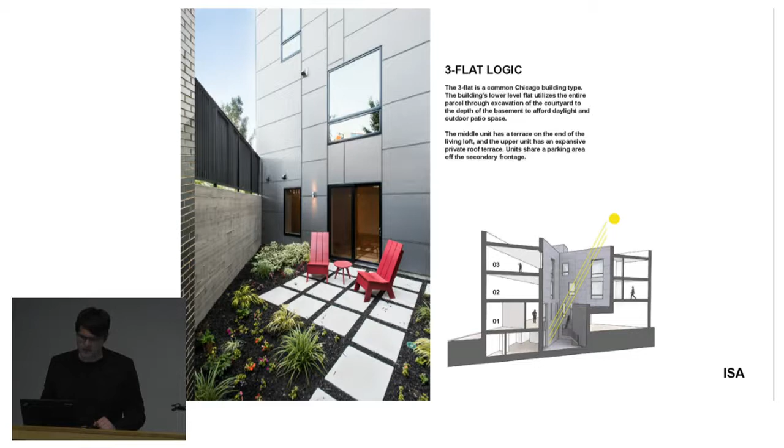One of the things we learned in Philadelphia with energy efficient housing is that it's all about the envelope—that by insulating a house well and air sealing it well, you can take 80% of the energy out of the house.

What's funny about this challenge is we've become very skeptical of net zero, because we feel like if everything was 80% better, we'll have done so much more than having a few net zero projects. But because you get into conversations about going to net zero or net energy positive, you're going to need solar panels. We literally had a conversation once with a client about whether you cut down the trees on the site to make sure you get the solar exposure to meet the challenge. So you get into these wild conversations.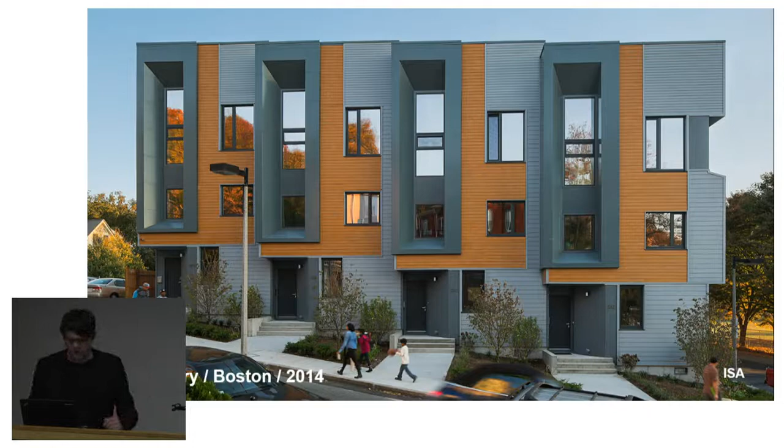Anyway, what was interesting about the project is we took this envelope idea—this is a double stud wall project with lots of insulation. I think we were approaching like R65 in these roof assemblies. Basically it was, how much PV do we need to get over the hump?

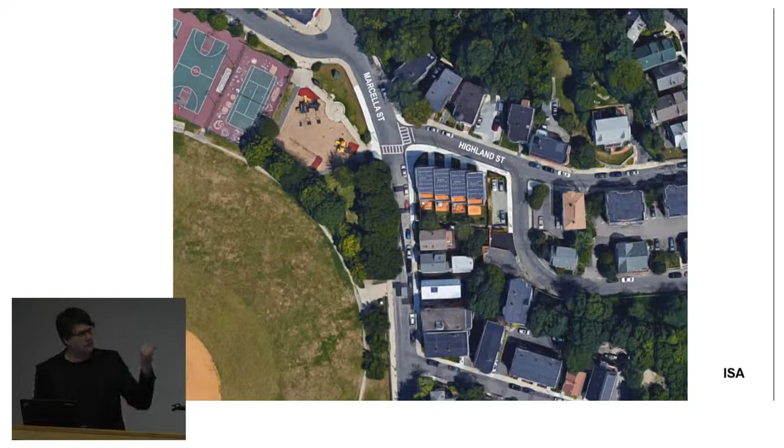You can kind of see the nature of the site here, and you can see the solar panels on the roof, which are pretty extensive. At one point we actually thought we'd be wrapping the whole back of the house with PV, and we're kind of happy that we were able to keep it on the roof. You can see that that actually revealed the opportunity for terraces in the back, which I think you can see here.

You can kind of get a sense that the geometry of the roof was calibrated to the solar angle. There's a stack effect ventilation strategy.

This is apparently in a pretty challenging neighborhood in Boston, we could never really see it. But this was seen as, there's a massive affordable housing shortage in Boston, so they're very interested in figuring out how to provide new housing types that save energy but also hit a certain price point. These are price points beyond what Philadelphians and Detroiters know as affordable, but it's a different market. You can see a lot of the same strategies deployed here that we're deploying other places.

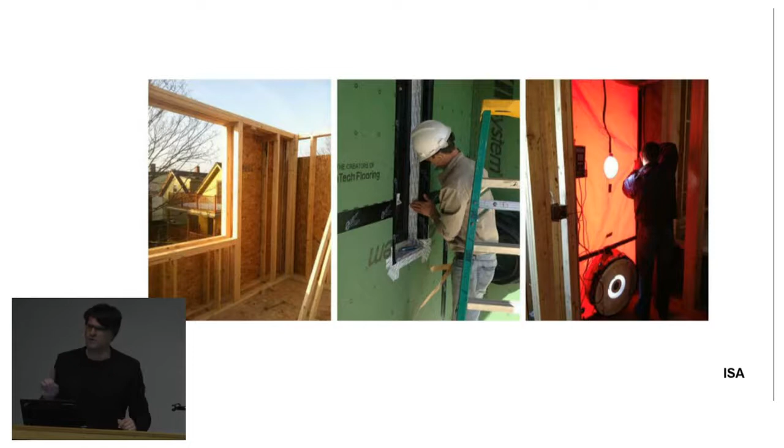As much as we want to believe that design is such a big part of high performance buildings, this is where it happens. Making sure these guys, you can see the double stud wall, this had blown-in insulation. What this guy is doing in the middle picture is incredibly important, which is to button up all of the potential areas for air exchange.

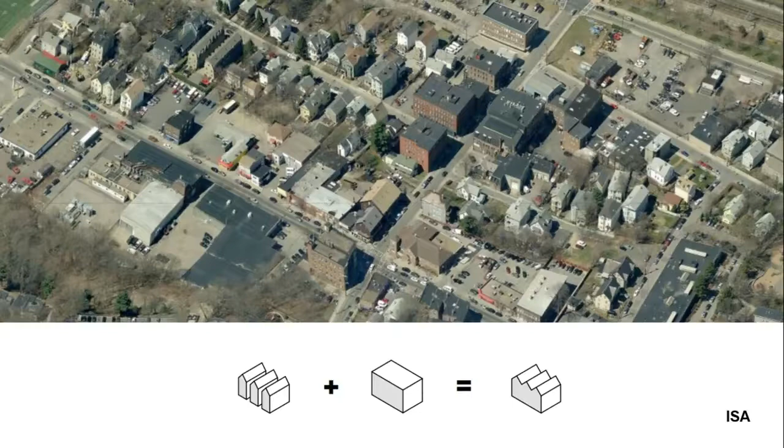And this is our current project in Boston that's going through review. I want to talk about context again because it's something we're really interested in, thinking about how to generate opportunities out of the fabric. Our argument here was this neighborhood has big warehouses that look like warehouses and commercial buildings, and little houses that have pitched roofs. So our strategy was to create this hybrid.

What was kind of interesting about that, and it goes back to this mezzanine level, the top of the building, where we start playing with this roof shape, generates these double height spaces and sleeping lofts and incredible views. I think it's super interesting how context generates possibilities for something new that's still very much in keeping with what was there.

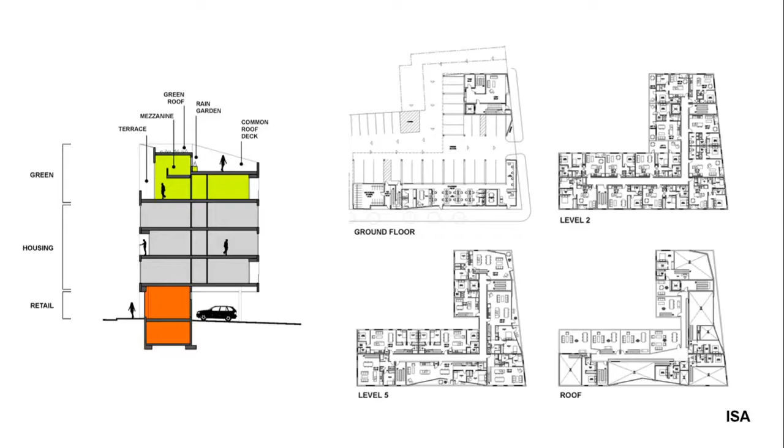There's nothing more fulfilling than a neighborhood meeting where people actually pick up on what you're doing and feel like, I understand, I respect the fact that you're trying to pull that out of our city. I think that just goes back to this idea of sharing logics with stakeholders. You can here get a sense of the retail base and the common roof deck, which actually happens behind that kind of crenellated roof form, which you can kind of see there.

DIY house. So we did have a moment where we were pitching a version of 100K to Detroit, and I'll share with you what our thought was, because I remember coming to Detroit and meeting with Midtown, and this whole idea that a $100,000 house would be preposterous, like it would have to be a $10,000 house, and we were kind of scratching our heads like, okay.

But what was interesting about it is it really got us to think a little bit about how one might adjust that thinking. Our idea was, at first we thought, well, you build a small house and you can add to it, but then the idea became, well, if we want to go high performance envelope, the climate here is such that that makes sense, it gets cold. To really explore where the certificate of occupancy happens and try to ratchet back the investment in the house as far as you can.

The building code, I don't think would quite allow this, we're being a little speculative with this, but the idea being that you capitalize on the emerging maker culture of young people in Detroit, saying well, you don't want people messing with the envelope, but you can certainly have people building out the insides of their house through time incrementally and living in them in different ways. So that was really the theory of the project, this idea that you build out the envelope, but let the inside of it happen through time.

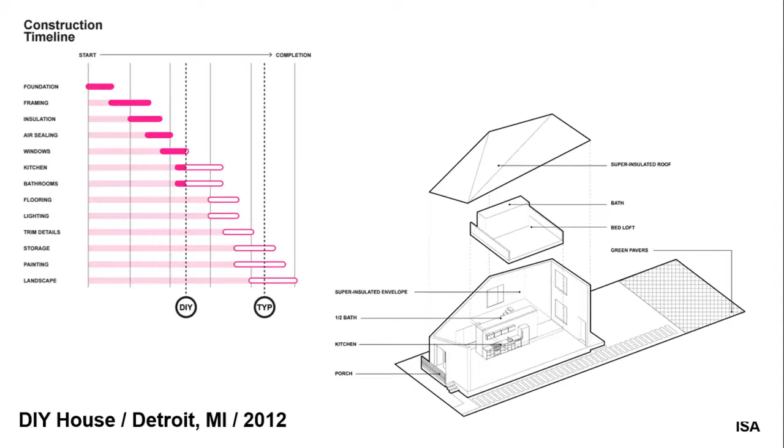So interior partitions, painting, lighting, storage, flooring potentially, to allow that to become a kind of ongoing activity. Everybody's house has... I mean, people work on their houses constantly after they purchase them. So the idea was, can we ratchet that back? And that was our version of what that might be.

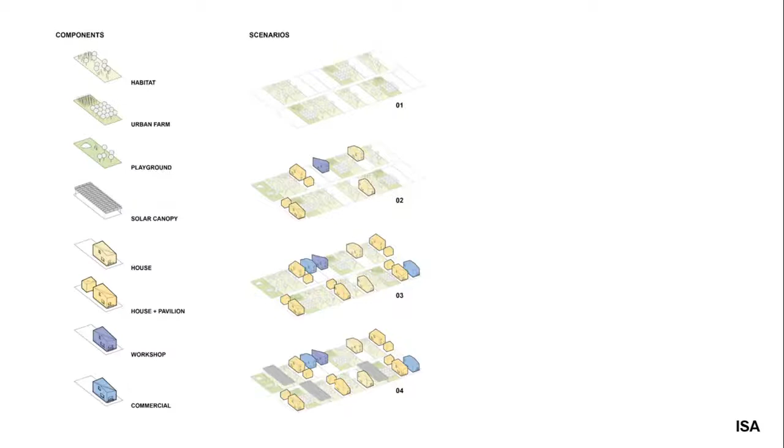We also thought a lot about the incremental urbanism of that kind of idea. This was 3 or 4 years ago, there was this whole discussion about why would you build new things when there's no market for it. And I think the idea became, well, maybe it's this combination of aspirational and retrofit, and that new things say something about the vitality of a market. Frankly, I think you're starting to see it. It's happening now, which is exciting, and I think that's important.

So I added this because Scott and I had this conversation today about evidence-based design, which is this whole other topic. But I wanted to mention it because we've done a number of projects where we collaborated with a health scientist on outcomes-based design related to health, and this was a project for supportive housing, a competition in Syracuse. I'm going to have to talk through this very quickly, but the idea was...

She creates this kind of brief, does a literature search. It's a way of starting a project. For this population, there is known, credible literature supporting these conditions and tendencies, exposure to light, the way people socialize. And so the project that we developed was coming out of this, and I don't want to present this as a one-to-one relationship, but as maybe a sort of method or a way of thinking.

What was interesting is at the larger scale of thinking about how this filters in, one of the conclusions we had about this project was that there were different kinds of social spaces—spaces where people are ensured they won't encounter people unlike them, versus conditions where they might be exposed to the public.

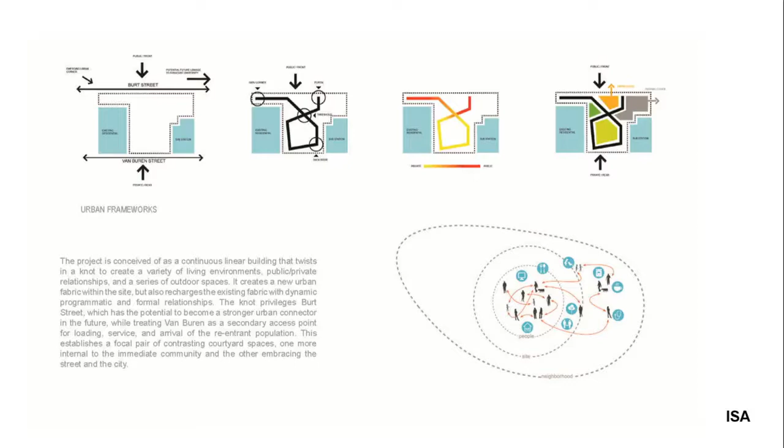And so that actually hatched this idea of the two courtyards, where the inner courtyard was for residents only, and the outer courtyard was this interface with the street. That's what generated this knot of an inner courtyard, and then the beginning of an interaction with the public, and also the beginning of a building that starts to make a street wall, which this city doesn't really have at the moment.

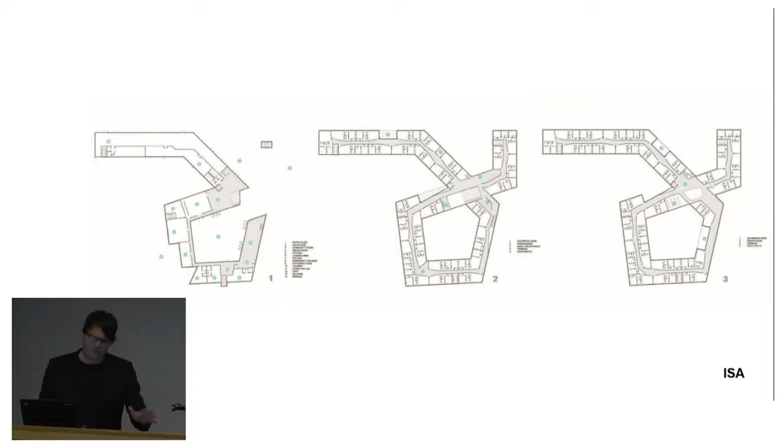So we have a series of projects. It's a whole other talk, but I wanted to mention it because I know this is on the minds of some of the faculty and students here. We're very intrigued by this idea of evidence, and this question of how architects react to big data, which is only going to be an ongoing condition, and how do you parse it. So this is an example of us beginning to grapple with that.

And finally, I just want to circle back. I'm five minutes away here to questions. We good? Excellent. So the Granary project, which kind of imploded at one point, was kind of interesting.

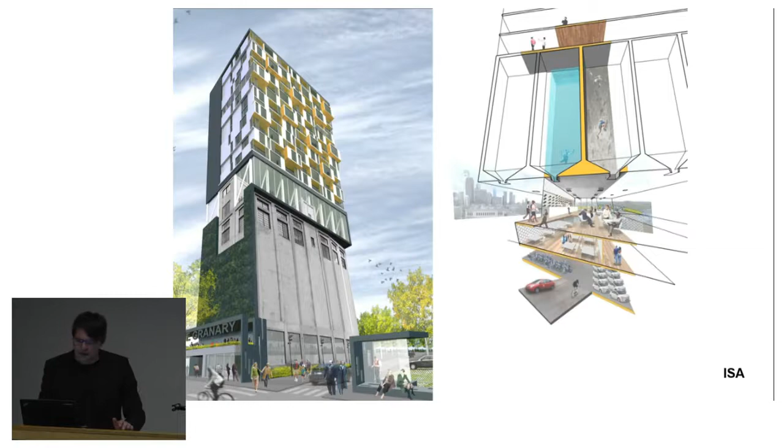No, I mean, it didn't literally implode—well, the wood frame grain version of it actually imploded, but the politics of the project fell apart for us. What was interesting is on the back end of that, the Pew Center for Arts and Heritage, who's been a friend to us in a number of ways, said Philadelphia just isn't thinking big about history. They wanted to ramp up the discussion around historic preservation, and gave us room to invent. They funded three different cycles of this project we called Gray Area, which was really about how historic preservation tends to be either you keep it or you don't. It goes back to some of these projects I was showing—how can we begin to tinker and tool around with that?

So I think some of the things we argued was this idea that traditional preservation tends to be very focused to the left of this, which is about buildings and details - like the first slip form concrete building, we can't touch it, that's important as a kind of memory - but really beginning to think about neighborhoods and cities and how they're affected by both positive and negative qualities of old construction.

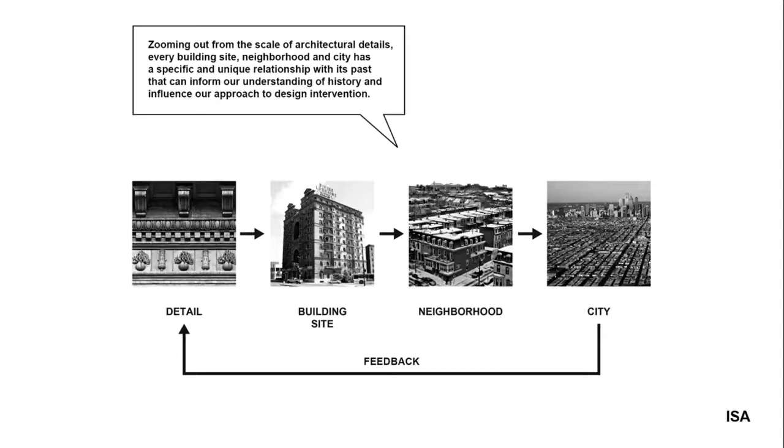Our first cycle was really the challenge of how do you begin to calibrate preservation to the local conditions of your city, which I'm curious about what the conversations are like here - they must be fascinating. But the first iteration was just figuring out if people cared and asking big questions.

The second iteration was a dinner we had for 100 people, which I'll show a couple pictures of, and had some conversations. And then the third one was really going to the neighborhood level.

The first iteration was a book we put together, inviting a bunch of our friends that we thought were doing interesting things in Philadelphia. The first thing was to say actually there are interesting responses to history happening - it's not to say that there aren't. And we talked about shells, platforms, and voids.

Shells are going in and changing the inside. Platforms are like the granary in the eastern building I talked about, which are literally like plinths or objects upon which you can build. And then voids - much like Detroit, Philadelphia has a lot of vacancy and underutilized area - and we wanted to include that as part of the history-making, organized around that.

The second iteration was the dinner for 100, and I apologize - clearly we'd all been drinking, because this photograph is of embarrassing quality.

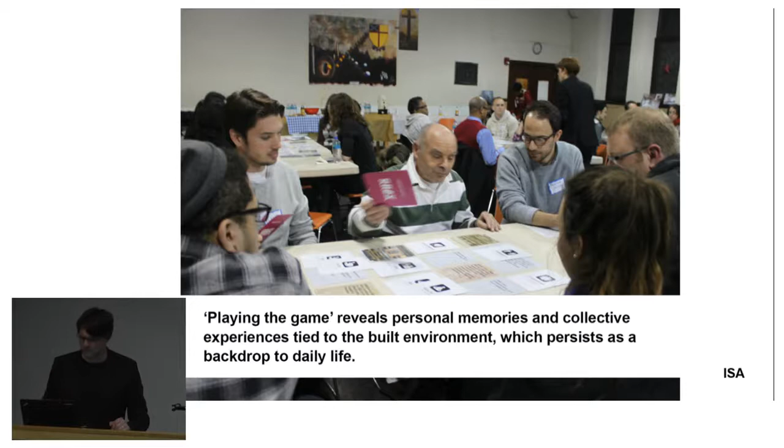What was fascinating is there was no real conclusion, no product, outside of the fact that students, 40-year neighborhood residents, professionals and non-professionals sat at a table and talked in a way that we found - what we realized is if we were leading the conversation, it would be a very different vibe than the card deck allowing people to talk through some of these issues. So this is a real budding interest of ours in thinking about methods and mechanisms for conducting this idea that we think of as influence through the conversation space.

We're at the moment in the running for a very interesting grant that would allow us to do a much more expansive row house study in Philadelphia. There's a number of other things we're doing that we see as a kind of feedback loop for the practice. We take building buildings very seriously, but also take spin-off opportunities like the Gray Area Project and the row house research, and some other things we're doing to help reinform how we're doing that.